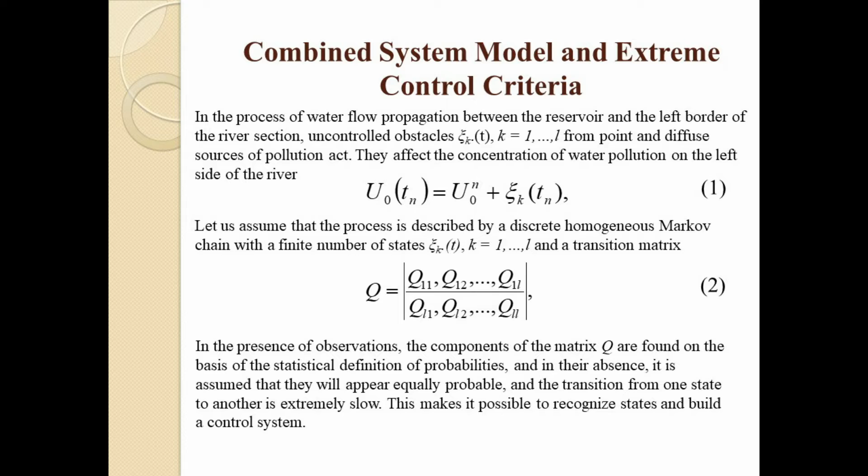The components of the matrix Q are found on the basis of the statistical definition of probabilities, and in their absence, it is assumed that they will appear equally probable, and the transition from one state to another is extremely slow. This makes it possible to recognize states and build a control system.

Analysis of the water dilution control system showed the need to apply combined extreme control system under conditions of uncertainty. We developed structural and functional diagram of the combined system for the extreme management of water dilution in the river section, where first is the object of management, the river section, the second the open part, the third the situation recognition block, fourth the decision-making block.

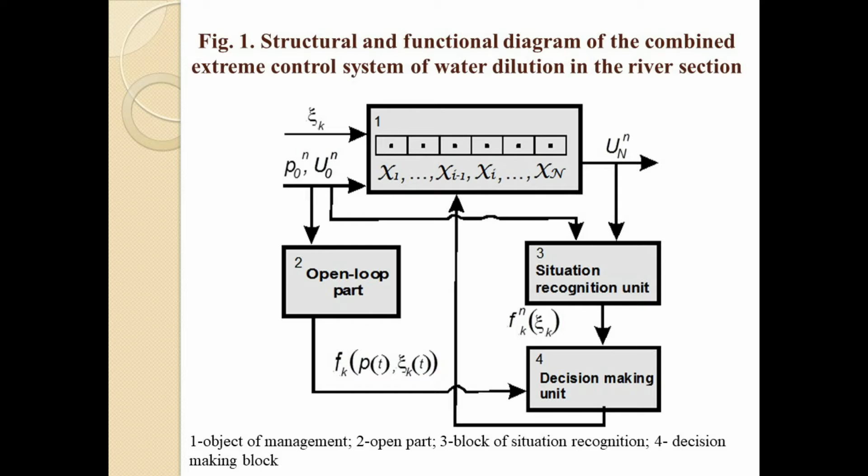Identification of the system, Figure 1, begins with the identification of the open loop part of the system for each of the characteristic values of the obstacle. Formula 3. This means that for the disturbing effect, the value of discharge from the reservoir, the control action is determined: the discharge from the pipe for dilution. In this case, the extreme characteristic of the control system is the concentration in the initial N-section on the right border of the river.

Formula 4 is given in the form of two-sided inequalities. Formula 5. During the control process, its value falls within the specified allowable interval. Formula 6. Here the function phi is expressed as a result of simulation modeling based on the proposed models of the dynamics of the spread of pollution. Un is the concentration in the control section below the full mixing section on the right section of the river. Here, U-lim constant is an ecological criterion. Umpd constant is an economic criterion. The criteria are set as constants.

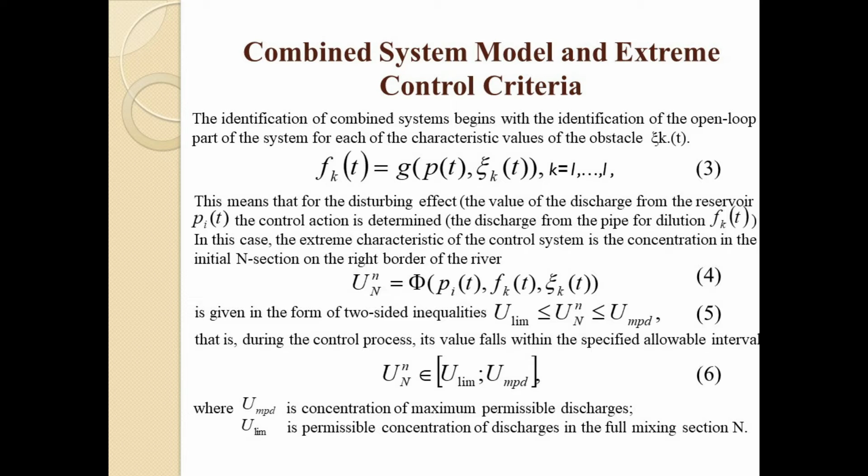If Un is less than Ulim, then the environmental requirements are met. However, during the dilution process, significant excess water consumption occurs. If the concentration Un exceeds the maximum permissible discharges Umpd, environmental requirements are not met. In both cases, it's necessary to correct the control action, Fk, flow rates from the pipe. In the first case, the control influence, Fk, is increased. In the second, Fk must be reduced to achieve condition 5.

Management decisions are made on the basis of a closed-loop system of extreme control, Figure 1, with a corrector, a recognition system. It includes a situation recognition unit in which the state of the object is determined, the acting obstacle ξk(t), Block 3. Situation recognition is carried out on the basis of input and output data simultaneously. This is the essence of combined control.

For input values P fixed at a certain moment Tn, recognition is based on determining the degree of closeness of the current image Un to the original value, one of the prototypes Un(ξk), that is formula 7.

On the basis of simulation for each situation ξk, the characteristic of the open part is determined, dependence 7. As a result of recognizing the situation obstacle ξk, the extreme characteristic is determined and decision-making block 4 is carried out according to the calculations based on the dependence fk(p(t), ξk(t)) of the open part of the combined extreme control system. In this case, for the known disturbing effect Pn, the regulating effect Fn is selected according to dependence 3.

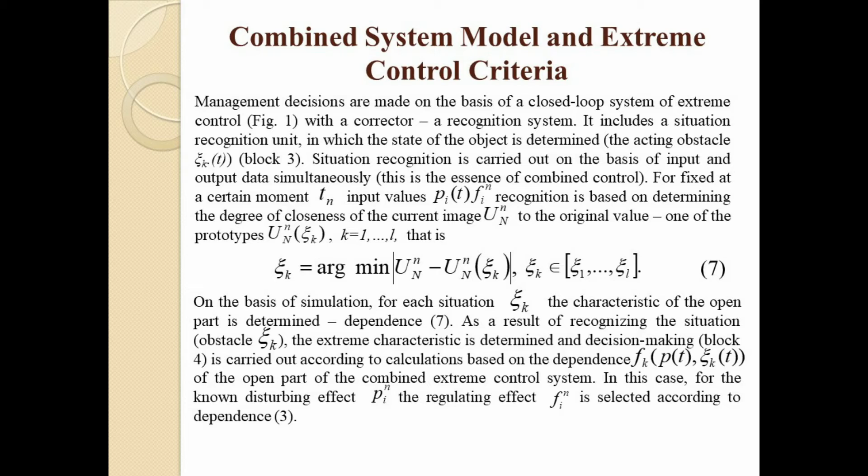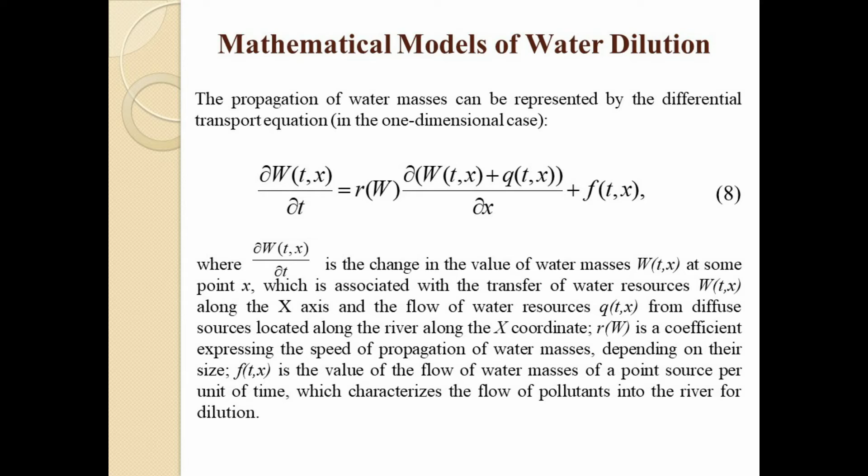In scientific developments for the modeling and management of water dilution, models of physical processes of the spread of water masses and the dynamics of pollution in a water flow in the presence of point and diffuse sources of pollution in the river section are put. The propagation of water masses can be represented by the differential transport equation in the one-dimensional case, Formula 8.

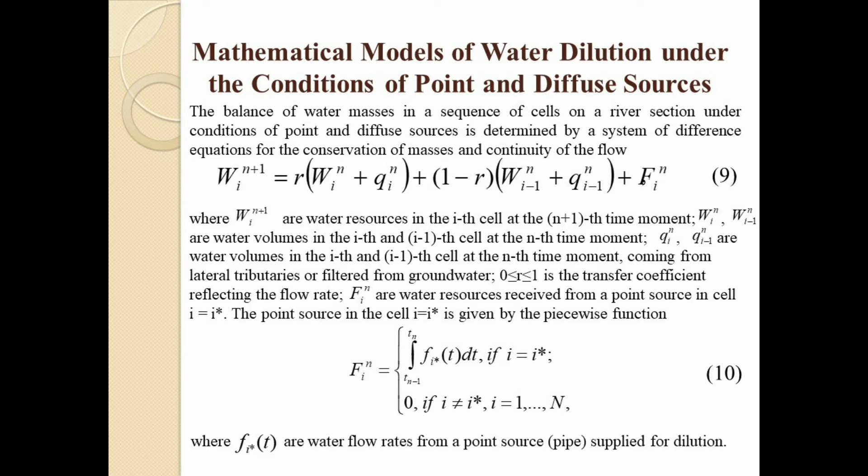The balance of water masses in a sequence of cells on a river section under conditions of point and diffuse sources is determined by a system of difference equations for the conservation of masses and continuity of the flow, Formula 9. The point source in the cell I equal I asterisk is given by a piecewise function, Formula 10.

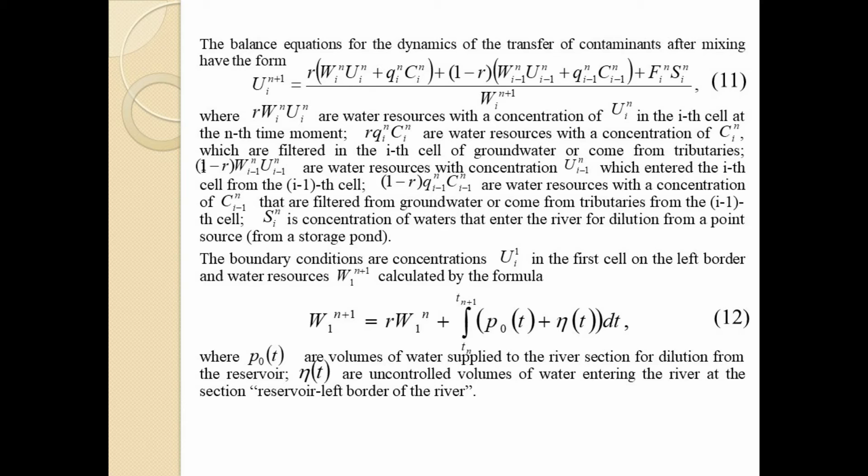Simultaneously with the transfer of water masses, the transfer and dilution of hydrochemical elements, chlorides, sulfates, etc., located in river water and in point sources of pollution is carried out. The balance equations for the dynamics of transfer of contaminants after mixing have the form Formula 11. The initial conditions are water resources with concentrations in each cell. The boundary conditions are concentrations in the first cell on the left border and water resources calculated by Formula 12.

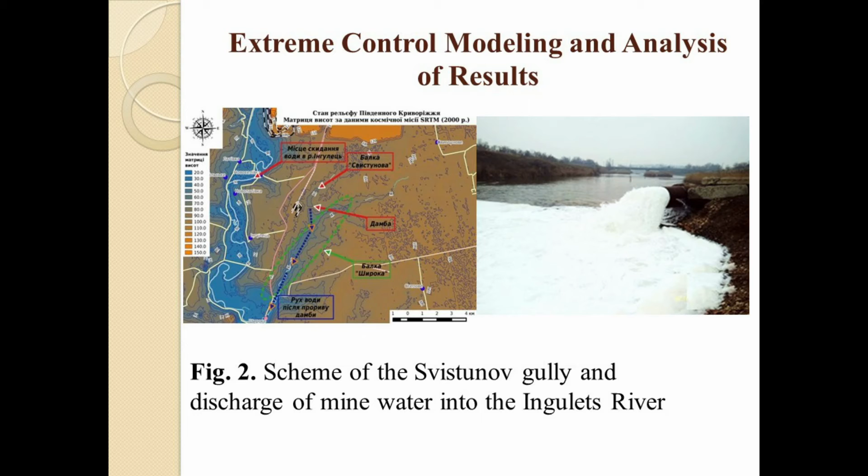Ingulets River pollution is carried out not only by the organized discharges from the storage ponds in the period from November to February-March. To prevent emergencies during the non-growing season 2020 to 2021 from November 1st to March 15, the discharge of the excess return water from the mining enterprises of Kryvbas was allowed.

At the same time, and throughout the year, there is constant pollution of the Ingulets River by unorganized discharges from dumps, diffuse sources of pollution, due to filtration groundwater. Fugitive discharges from diffuse and point sources of pollution acting on a river section and not amenable to measurement are called uncontrolled obstacles in the theory of extreme management. The obstacle, ξk(tn), significantly changes the extreme characteristic, carrying out a stochastic change of an uncontrolled indicator within certain limits.

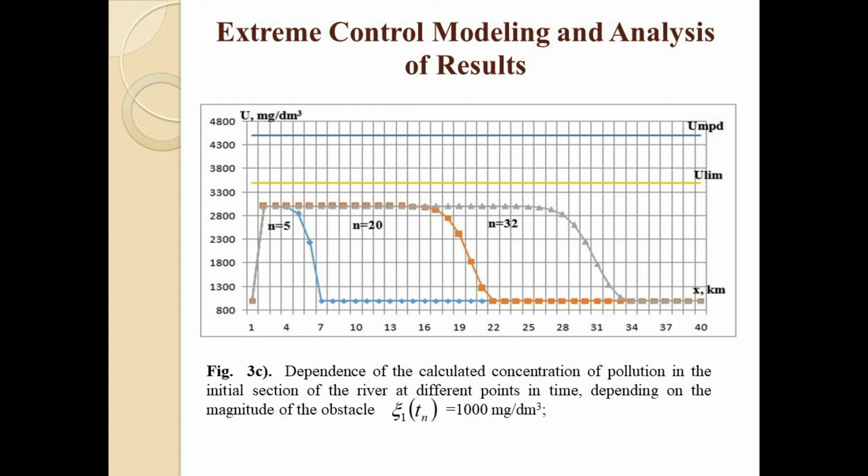Analysis of state monitoring data showed that in terms of chlorides, in the absence of river washing, the background values are within 1000 to 2000 mg per cubic decimeter, reaching 3000 mg per cubic decimeter. Therefore, to identify the obstacle, it is advisable to take Xi0Tn 160 mg per cubic decimeter, background values of Karachunivske reservoir water, Xi1Tn 1000 mg per cubic decimeter, Xi2Tn 2000 mg per cubic decimeter, Xi3Tn 3000 mg per cubic decimeter as some prototypes when building a corrector with a recognition system.

A comparative analysis of the actual water dilution carried out in the period from January 28 to March 15, 2021, with the modeling of the process according to the developed algorithm of the combined system of extreme control showed satisfactory water quality in terms of chlorides in both cases, figure 4, which does not exceed the maximum allowable discharges of 4.5 grams per cubic decimeter. However, in the regulations for the discharge of surplus return water from the accumulator, for the control calculations of concentrations, 3.5 grams per cubic decimeter is unreasonably accepted for chlorides, which leads to overconsumption of water resources when water is diluted.

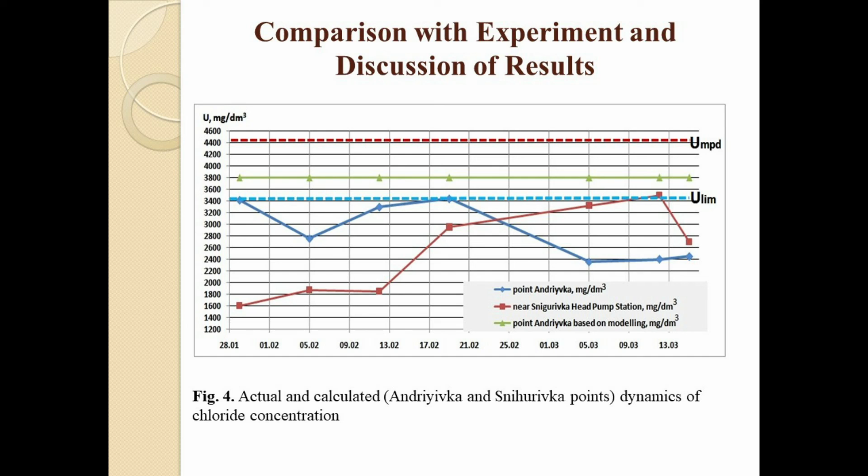Therefore, in terms of the amount of water consumption for flushing, the proposed version of the combined extreme control modeling has significant advantages. Water saving is about 17.5 million cubic meters with a dilution of 6.3 million cubic meters of wastewater, figure 4. Thus, the combined system of extreme control, which optimizes the decision-making process according to the principle of two-criterion optimization, has significant advantages in terms of saving water resources compared to water supply under existing regulations.

The development of the theory of combined extreme management systems on the principles of multi-criteria optimization has allowed developing new tools for management in social, ecological, and economic systems, which are river basins. The theoretical principle of combined extreme control systems implemented in the mineralized water dilution in the Ingulets river basin on the basis of scenario analysis showed savings of up to 30% of water resources compared to existing regulations for water dilution.